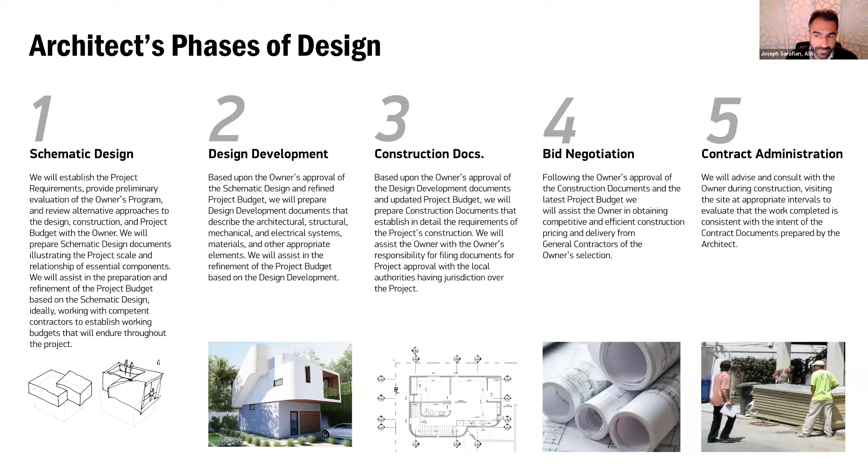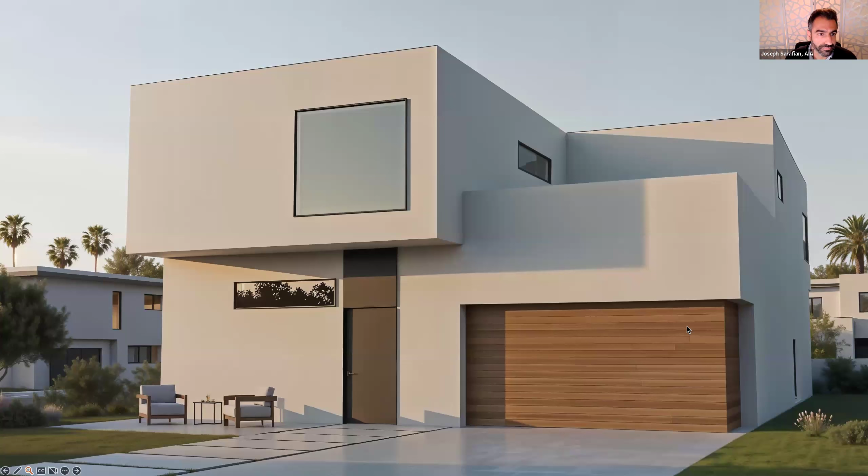But then we also create 3D views, so these views allow you to understand the massing of the project. Again, this is all at a schematic design level, so this isn't much more developed than maybe a month in. We help you understand what you're getting and also advocate for you throughout the process.

Joseph talked a lot about how we add value, but we also are your advocates throughout the whole process. So we mentioned billing—that's one of the issues where we want to make sure you get exactly what you're paying for, and you're not paying ahead of the construction during the process.

We like to talk about ourselves a little bit like the conductors in an orchestra, and the symphony we're conducting is your project, to make sure that you get what you envision. It's really about easing the burden from you. We help to coordinate all of that work so that it becomes a more seamless and painless project for you.

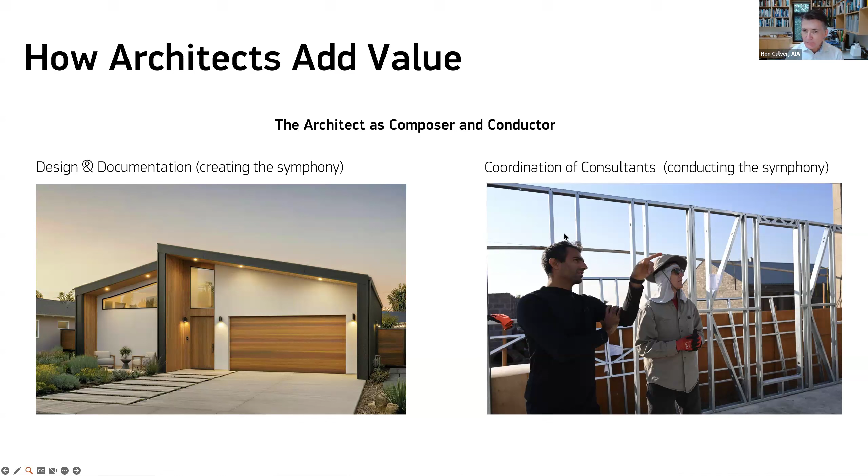With that, we can coordinate all the consultants during the design phase, but also we help to coordinate the contractor during the construction phase and ensure that the project's going properly.

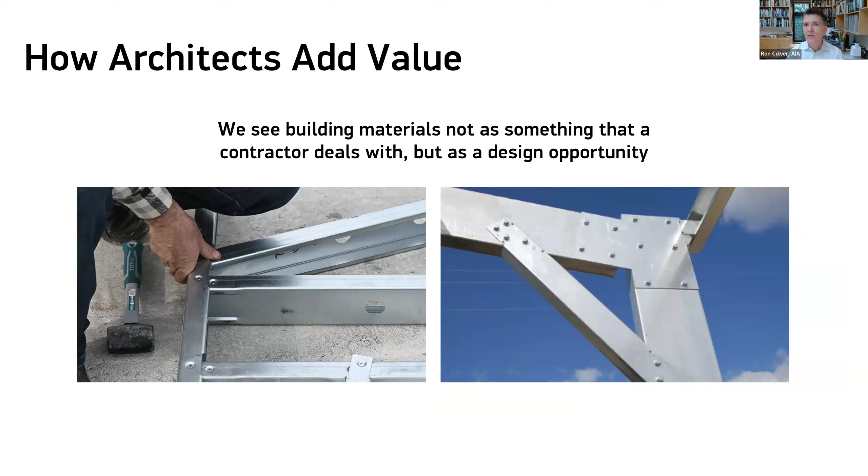We do a lot of research into building materials, and we build with multiple materials—concrete, wood, steel, composite materials—based on understanding the project and the requirements of the site. We advocate that not one solution fits all, but we use the best possible solution for your project. Some projects are hillside, some are flat, and they all have different characteristics where we want to make sure we're using the best possible design and material composition.

So there's a few different materials that we use, like light gauge steel. We've used heavy steel, but all the projects that we're performing in the fire rebuild areas are non-combustible.

As Joseph mentioned, we do projects that are net zero design, ensuring that you have the best potential energy conservation for your project, to ensure that not only do you just get a building right now, but it performs well over the long term and it saves you money.

So we're sensitive to that and to the client's needs. We always design with economy and quality, so we're adding value throughout the whole process.

It's not like we just say, here's a set of stairs. We're looking for the best design of the stairs and the most efficient way to put them in. That goes with every piece of the building, and we take a holistic approach to your whole design.

We have seen many pitfalls over the course of our careers as architects, and we know going in where you could have problems in terms of your particular construction process. We help to ameliorate those things and navigate entitlements and permits. Joseph mentioned we've worked in about 25 or more jurisdictions.

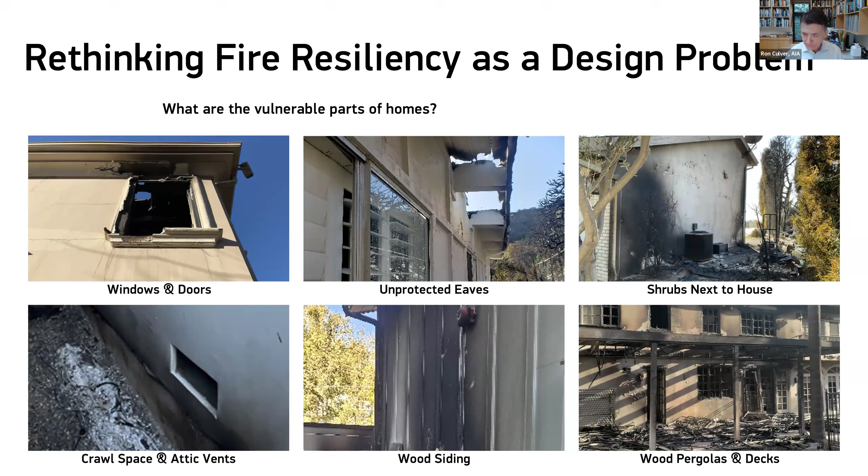When we're dealing with windows and doors, we use tempered glass. We also design with tempered and laminated glass, one layer tempered and the other tempered and laminated. This not only helps for fire resiliency because the laminated portion won't fail completely under high heat, there's a polymer film inside it, so it will fail slowly.

Same thing with doors, enclosed eaves or not having eaves at all, ensuring we have a defensible zone. I think we all know about these issues and baffled vents. We prefer to actually build projects with no vents if we can, to eliminate that issue. It's also generally more efficient and less expensive to do things like slab on grade versus crawl space and attic spaces.

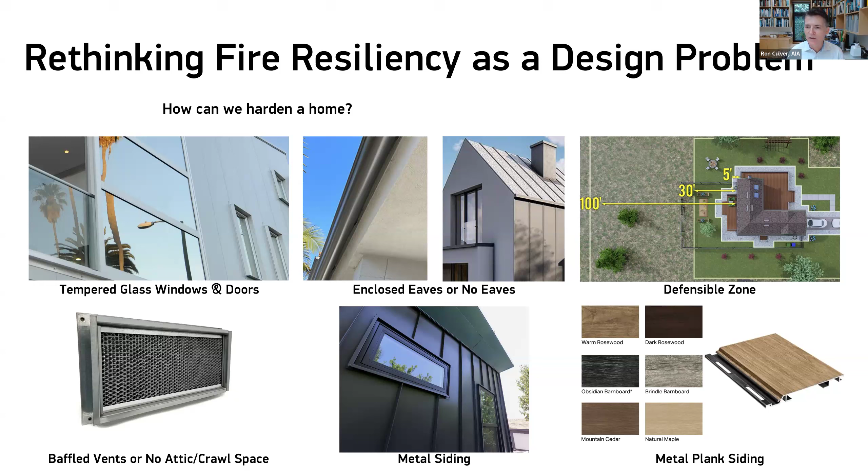Metal siding, and also when we design projects where we want some warmth rather than just metal all the time, or stucco, we can use metal plank siding imprinted with a wood grain. Not only is it fire resilient, but it has zero maintenance. If you have wood on your building, you know you have to refinish it over time. These never fade, there's no water or element damage, and they're naturally fire resilient. We can also use these for pergolas and the like.

The other thing is, if fire comes through a neighborhood and the home doesn't burn, we all know there's tremendous smoke damage. So one of the things about building with net zero energy, we have very tight building envelopes, with air wraps and siding that interlocks for air barriers.

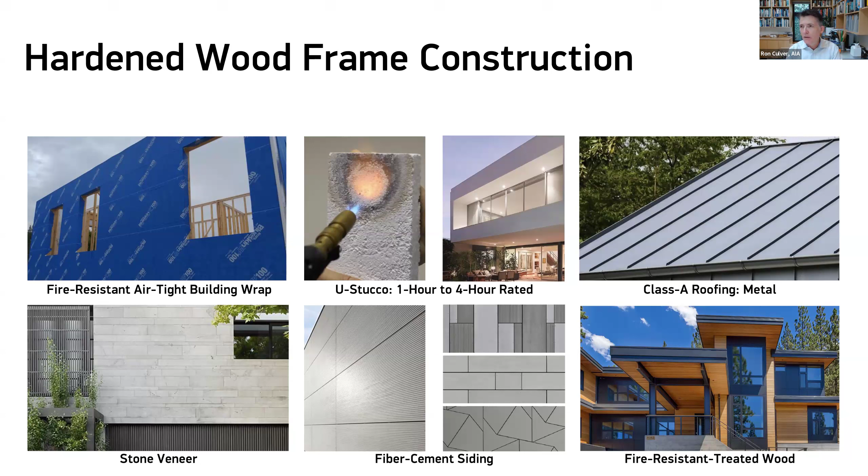We can even use a high fire resilient stucco if necessary, and we generally propose metal roofing and often metal siding that wraps with the roof. Stone veneers or masonry, concrete masonry units which can be burnished to look like stone, fiber cement sidings, and if we need to use wood, we use fire resistant treated wood.

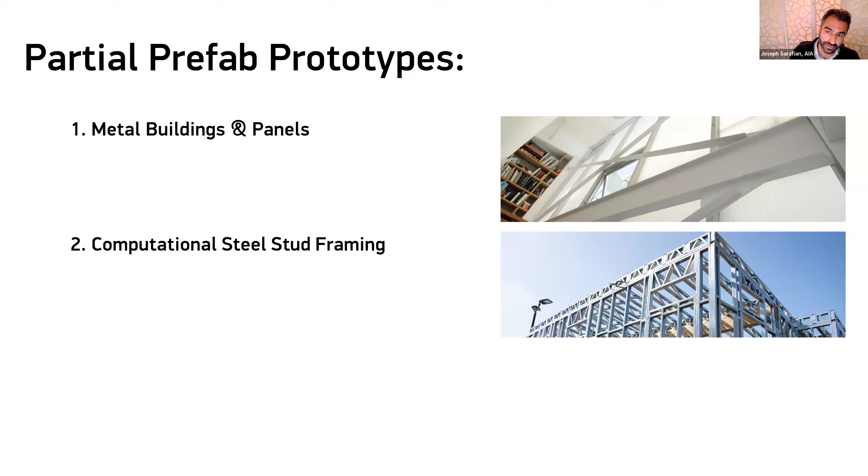While the foundation is being built, you can be printing the steel in a factory, shipping it to the site, and installing it in a matter of days versus weeks or potentially months of wood framing. So we'll talk about both of those systems here.

So the first one is metal buildings and panels. This is completely non-combustible framing, a factory kit of parts. It's recycled and recyclable steel, high insulation value, earthquake resistant, no termites, fast on-site construction, and typically about two-thirds the cost of conventional construction.

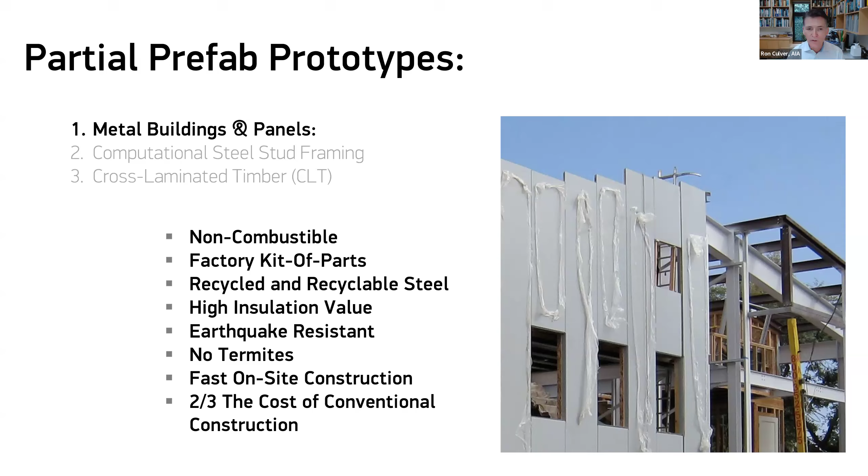The project we're going to talk about first is the Cleft House, a project in Venice next to the canals. It uses a metal building frame, kind of a Butler building or similar system.

This was a duplex in Venice on a very tight lot and a very tight time schedule. It had radiant floor heat and super insulation—the walls were R30 and the roof was R30, naturally ventilated and cooled. It's two stories plus a mezzanine and roof decks.

This particular building had internal balconies because there was no room for external balconies on the site.

So the structure is what we call hybridized—a combination of prefabricated components. In this case, the steel frame was composed of a standard box frame that you'd see in barns and factories, combined with an actual pitched barn frame.

Combined together, that was the particular composition of this building, with customized extrusions and cantilevers that help define the final composition. You can see some of the cantilevered sections, and all of this frame was assembled in about one week on site.

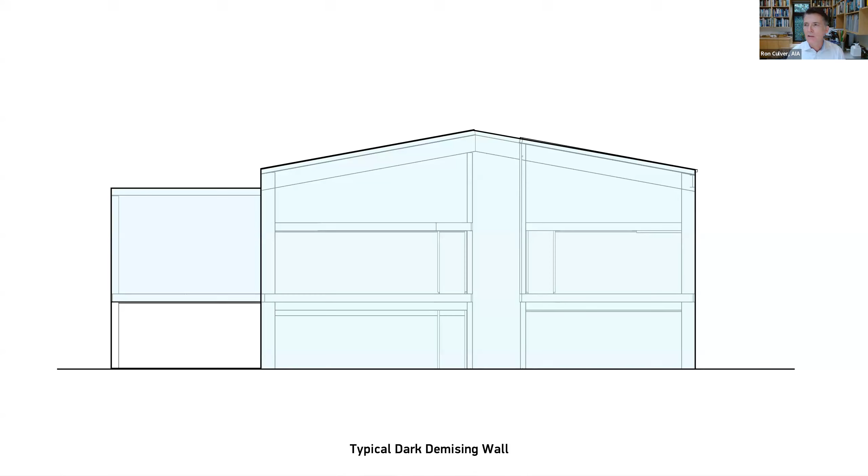So in this case, the duplex is typically a dark demising wall where the two units meet, and all you try to do is insulate for sound, but there's no light or air coming through. In this case, we opened up the building, created a 5 foot gap where light and air could come into both units, and it became a 30-foot tall translucent wall that enhanced the building versus made it sort of a conventional dark framing.

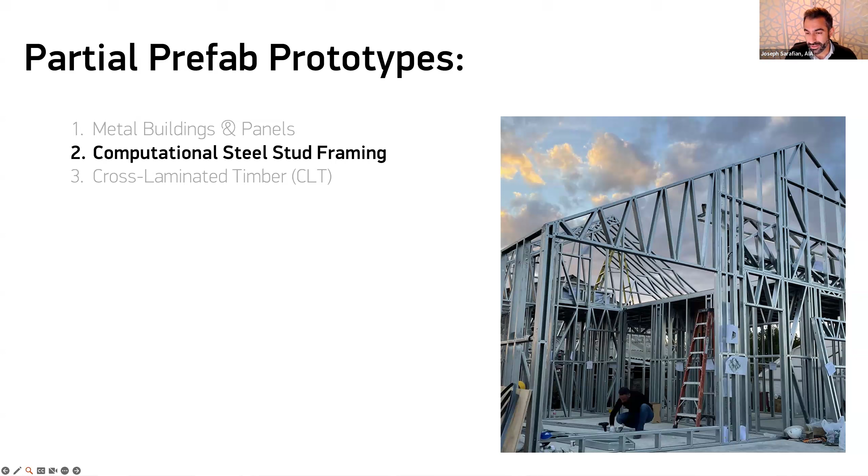So this next one, computational steel stud framing. This is a technology that we were introduced to maybe 8 years ago. This is a system that's gaining popularity worldwide, but it's been slow to adopt in the US because of the strength of the wood framing industry here and the wood framing knowledge that a lot of contractors have. But we think it's not only applicable here before the fires, but especially after them.

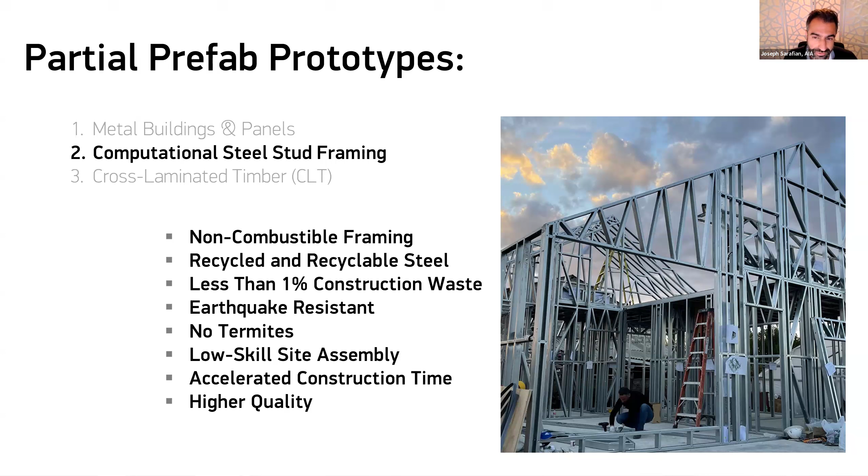And we'll design these K braces into the corners of the walls to keep everything a triangle, which is one of the strongest geometries. So that keeps the corners true when we're installing. Let's go to the next one.

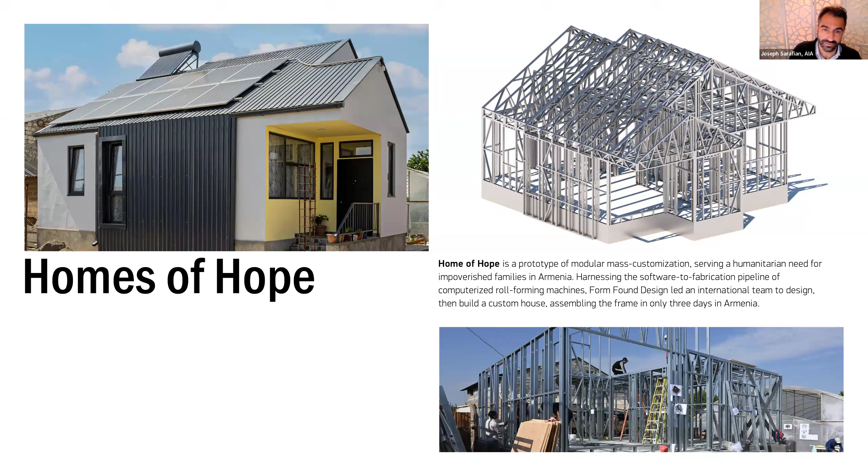So we've now built 9 homes in Armenia using this system. It was so easy that the first design that was selected was continued to be reprinted. This is a humanitarian project where traditional housing over there is built with concrete block that's unreinforced, dangerous in an earthquake zone. So we've designed and delivered these earthquake resilient homes built to Western building standards. We've built a number of these. You can see the corrugated metal as a design feature and solar panels, solar hot water heating so that they're completely off grid.

And so for these projects, we used volunteer labor. The construction cost was $40,000 US, but that's more about the cost of labor and materials in a foreign country. Solar hot water heating, and we were able to frame everything you see in the bottom right in about 2 days—3 days total of steel framing. And this is with a language barrier, with workers that didn't have a lot of construction experience.

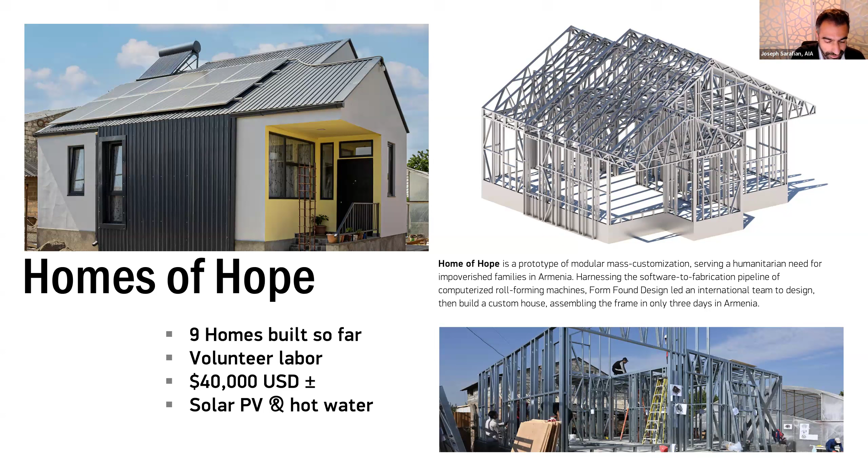But it's a kit of parts and it only comes together one way. So it's a much easier learning curve than introducing another foreign material.

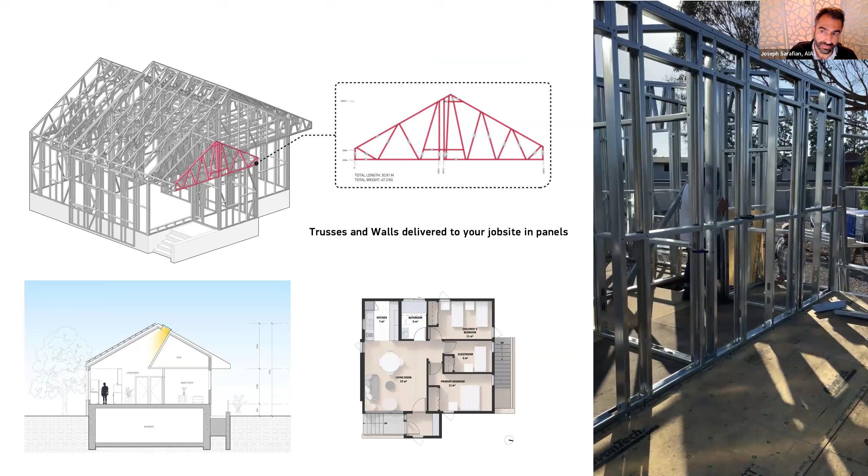We now have two companies we've worked with to deliver this, one LA based, one abroad, and both deliver steel the way you see it here. Same machine. These just get bolted to the foundation, and you can see the diagram of the truss in the middle, that pink illustrated drawing. That's similar to what a builder would see. They'd see every stud, how it's labeled, and then install the truss that way.

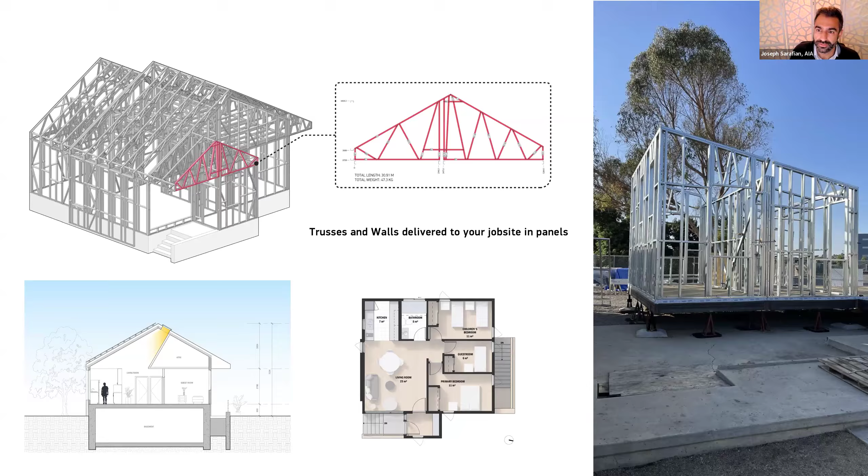With this, there's no guesswork. The contractor isn't guessing where each framing member is going to go. It's designed to fit in one specific way, and this takes the burden of complexity off of the plate of the contractor and into the hands of the architect. Contractors would typically have to determine where every stud goes in wood framing scenarios. With this, there's no guesswork, no improvising on site. There's a hole for every one of those webs, and it only fits together one way. So it's more about assembly than it is construction in the traditional sense.

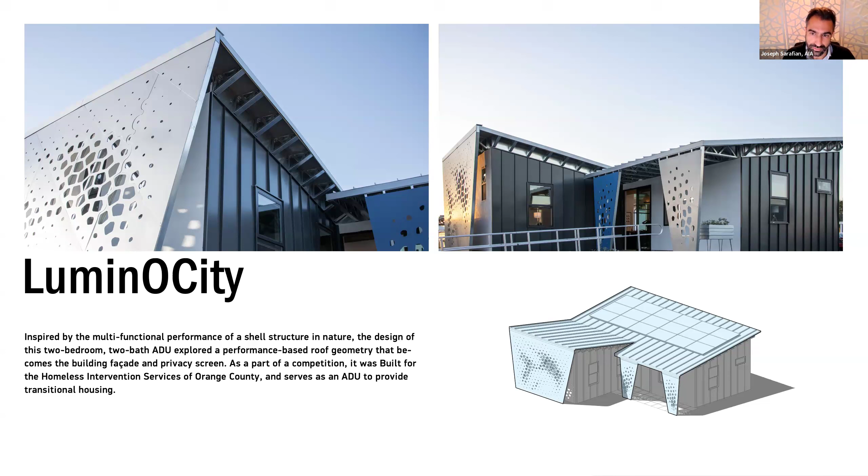This was the net zero project I mentioned. This won 9 awards for sustainability. The idea here was that the roof is like this protective shell. We designed a butterfly roof for this project. This was an ADU, so it's pretty small, 750 square feet. It's now in Placentia, and the roof covers down the southern exposure. We designed this lattice pattern that protects the southern exposure from sunlight and reduces heat gain, so it saves money over time, and it creates an interesting visual effect as well.

The design features two bed, two bath, again on a really small footprint. The idea was that this was donated to Homeless Intervention Services Orange County, where it helps transition young youth from juvie and from the foster care system into transitional housing before permanent housing.

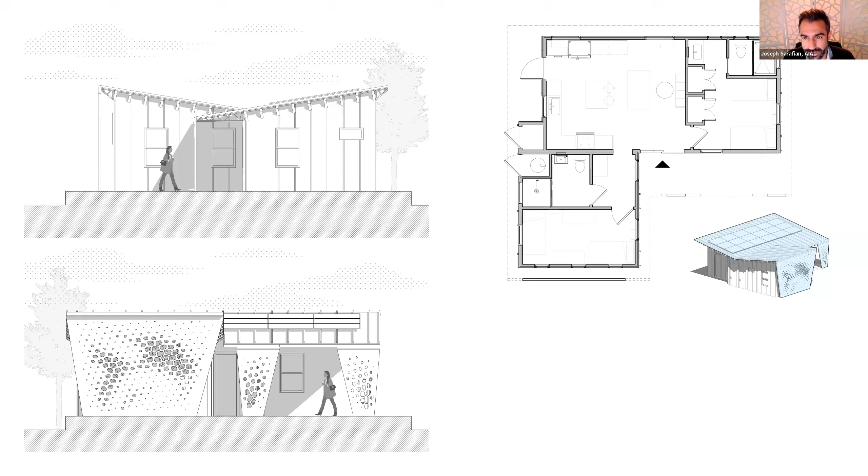They would live here for a year and then get job training and education before they move on. This project again is zero net energy, 13,000 kilowatt hours, solar panels. We have a heat recovery ventilator, which is a way of not wasting energy. If it's warm inside and cold outside, we still need to bring in fresh air from outside. So we're not just bringing it in, we're running it past the warm stale air on its way out, using the heat from inside to preheat the cool fresh air from outside. It's a way of saving energy and costs.

We used a heat pump hot water tank, which uses the heat from the ambient air around it to heat the water. When it's not warm enough to use the heat around it, it goes into electric mode and becomes an electric hot water heater.

We use a number of smart home devices. Panasonic donated all of the sensors and air quality monitors. We have a roof that's R53, which is the insulation value. So the roof is really well insulated, walls that are really well insulated, and all of that results in a home that I've walked into on the hottest day in summer and it was cold inside, nothing running, everything off. These performance features, little devices, insulation values, may be more of an upfront cost, but they save all of that and more over the lifespan of the building.

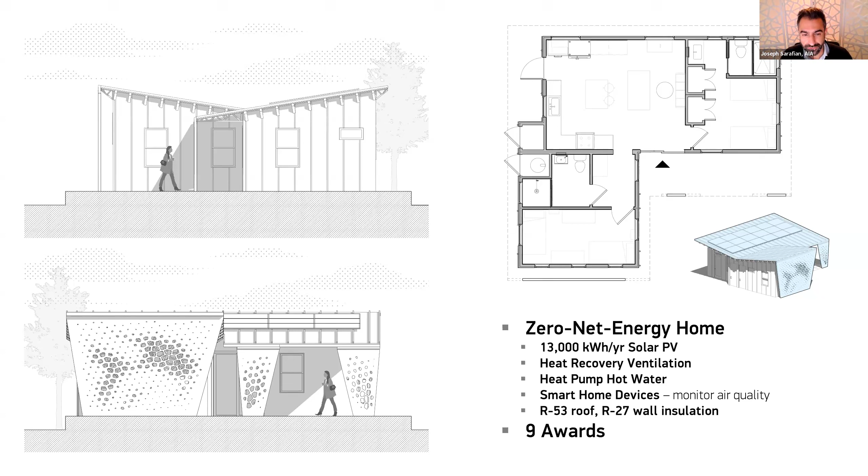So this won 9 awards and was completed this past summer. Here are some images of the framing. You can see the machine printing steel trusses.

We did have a glulam beam, or a Parallam beam here, that's technically a wood product, but that was just to create the span we wanted over the living room. This could have been built out of a steel truss. We just thought we'd expose it, but then ended up covering it.

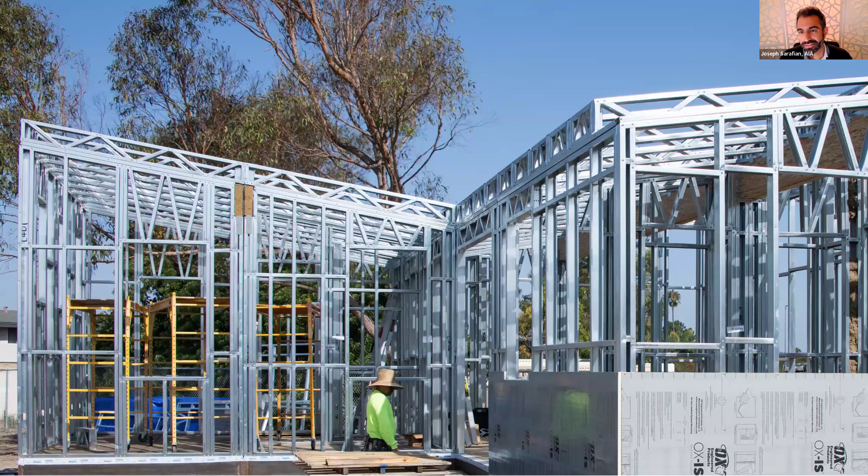So, another image of the construction. We used an Ox-IS product. Instead of having plywood sheathing and rigid foam insulation outside of that, this is an all-in-one product that is three in one. It's sheathing, insulation, and the water resistive barrier, the WRB.

Again, part of what we do is creative problem solving. On this project, there was an extremely tight budget, so we had to work with the parameters we were given and find a way to meet the design excellence standards that we have.